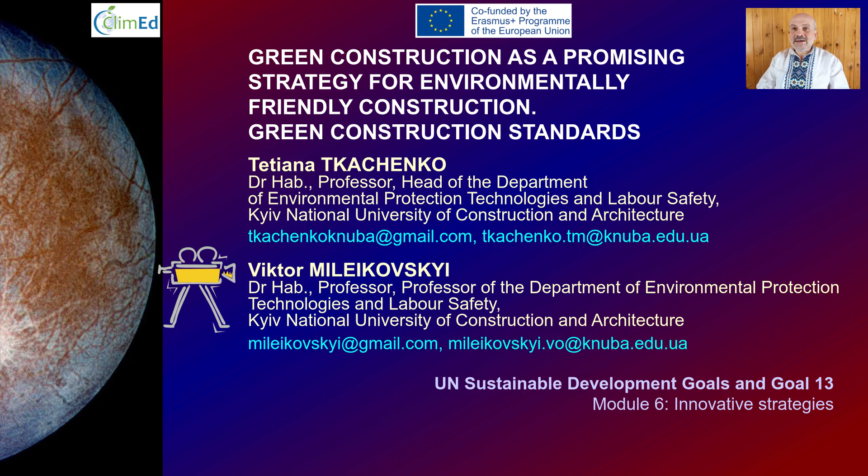Her approach for green structure placement in urban design allows involvement of biota into very high built districts with a lack of greening. In addition, Tetiana designed slope strengthening in Georgia, Ukraine, and other countries.

Let us start from the green construction concept. The problem of creating environmentally friendly buildings is solved by green construction, which can be considered today as one of the mechanisms for ensuring technogenic safety.

Green construction is a body of knowledge structured by design and construction standards. The level of its development directly depends on the achievements of science and technologies, on the activity of engineers, and on the awareness of environmental principles by society.

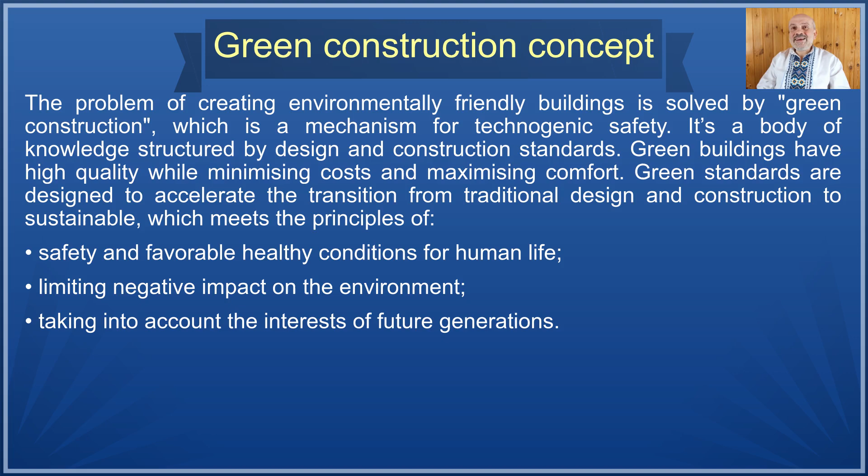Green buildings have high quality while minimizing costs and maximizing comfort. The implementation of green projects contributes to sustainable development, and although green technologies are a new and difficult direction of progress, they demonstrate high efficiency.

Green standards are designed to accelerate the transition from traditional design and construction to sustainable, which meet the principles of safety and favorable healthy conditions for human life, limiting negative impact on the environment, taking into account the interests of future generations. The role of green construction in the concepts of sustainable development of modern cities and territories is shown in this figure.

Green construction involves various areas of activity: the development of green standards, the use of new technologies, architectural and construction solutions, etc.

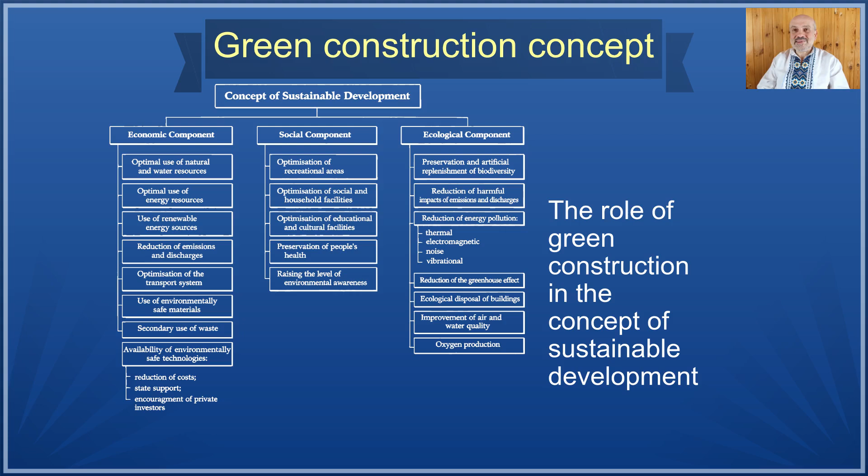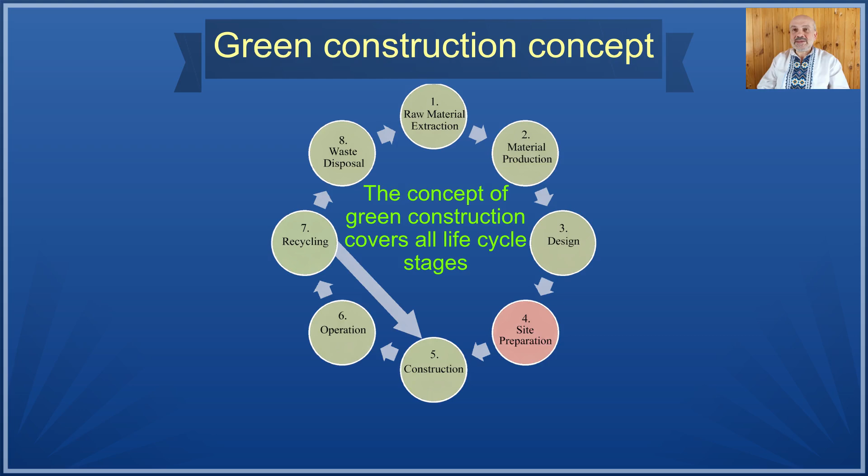The concept of green construction covers all stages of the life cycle of a facility, from raw material extraction to waste management after dismantling. Let us continue with green building standards.

Currently, all green building standards are voluntary, meaning that the customer or developer decides on the level of compliance of the building with the green building concept.

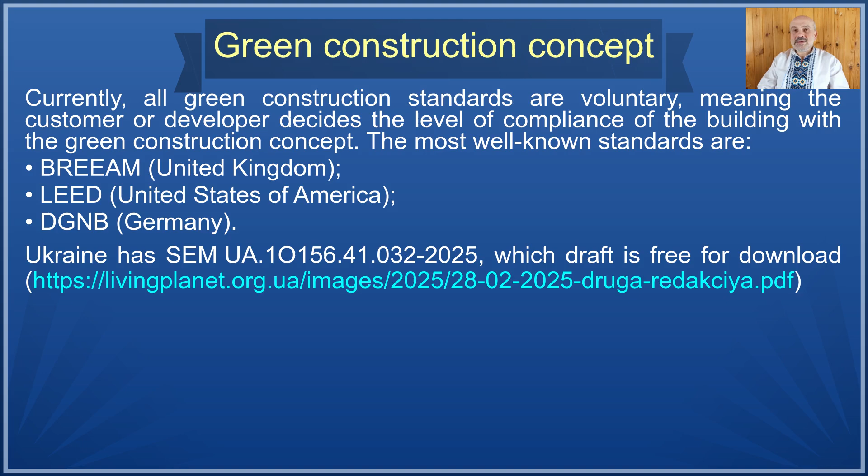The most well-known standards are BREEAM (United Kingdom), LEED (United States of America), and DGNB (Germany). Ukraine has SEM-UA, which draft is free for download.

BREEAM standard, Building Research Establishment Environmental Assessment Method, was developed in the United Kingdom by the Building Research Establishment. It's free for download, but registration is required. It has separate volumes that standardize new construction, reconstruction, and operation of communities.

In new construction, this standard evaluates construction management, health and comfort, energy efficiency, transport, water consumption, materials, waste management, land use and environmental friendliness, pollution, and innovations.

Green construction begins with management. Namely, the following are standardized: stakeholder engagement, appointment of a sustainability champion who will be responsible for the implementation of a sustainable project. This is followed by a life cycle assessment.

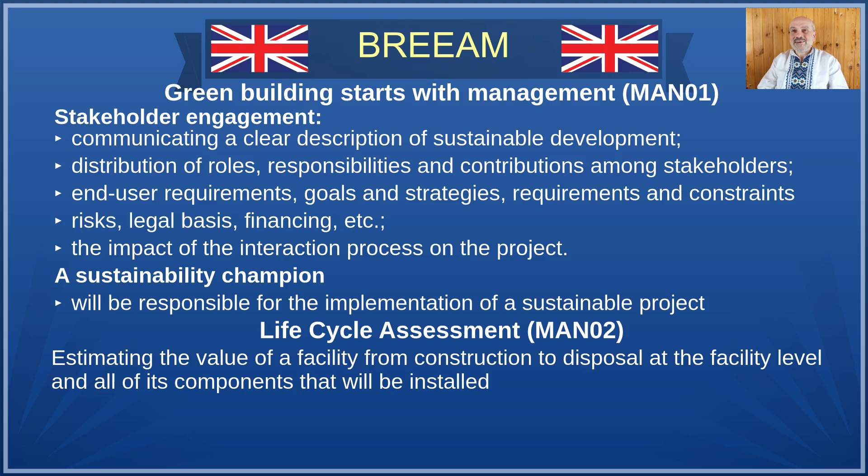The values of the facility from construction to disposal are determined at the level of the facility and all its components that will be installed.

The next is the construction culture. It means a comprehensive limitation of all factors that negatively affect both the lives of people around the construction site and the environment. In particular, the following factors are regulated: smoke and dust emissions, production of noise and vibrations, heavy transport routes, resource use, electricity, water, etc.

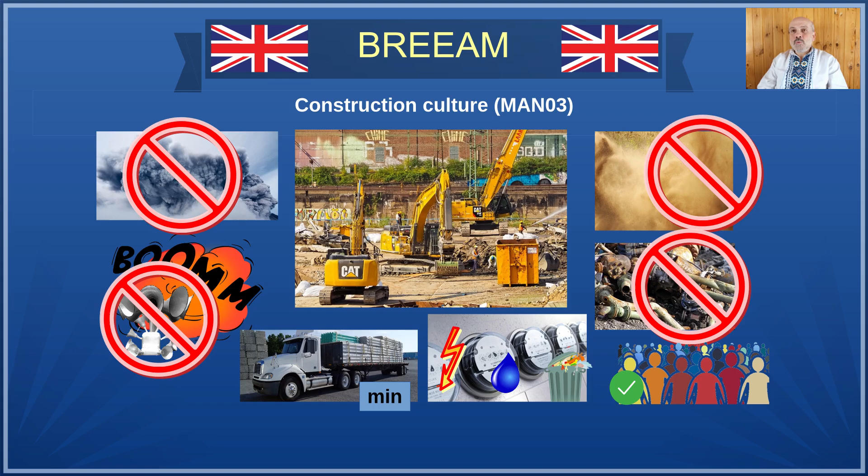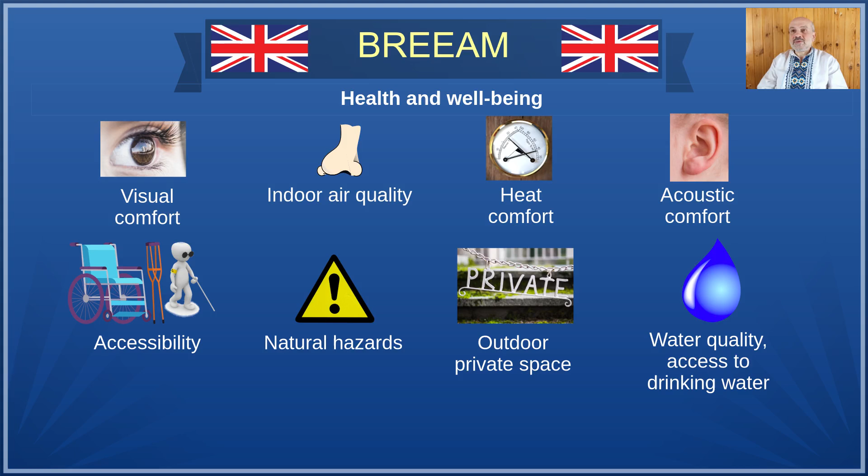The main condition is to promote the comfort of people around the construction site. In a building, the level of comfort is standardized as a priority requirement, namely visual comfort, indoor air quality, thermal comfort, acoustic comfort, accessibility, inclusivity, impact of natural hazards, creation of an external private space to ensure communications between people, water quality and access to drinking water.

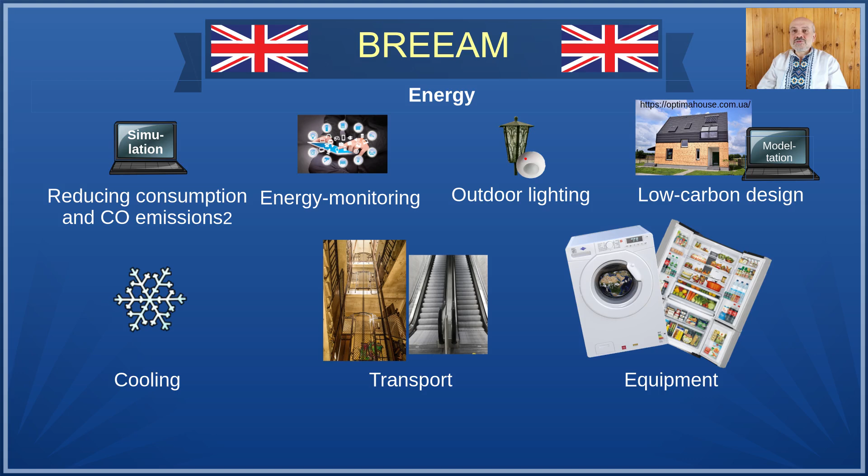Further, during operation, the consumption of energy and other resources, as well as carbon dioxide emissions, is standardized. Energy monitoring is provided. The standard covers not only building structures, but also equipment.

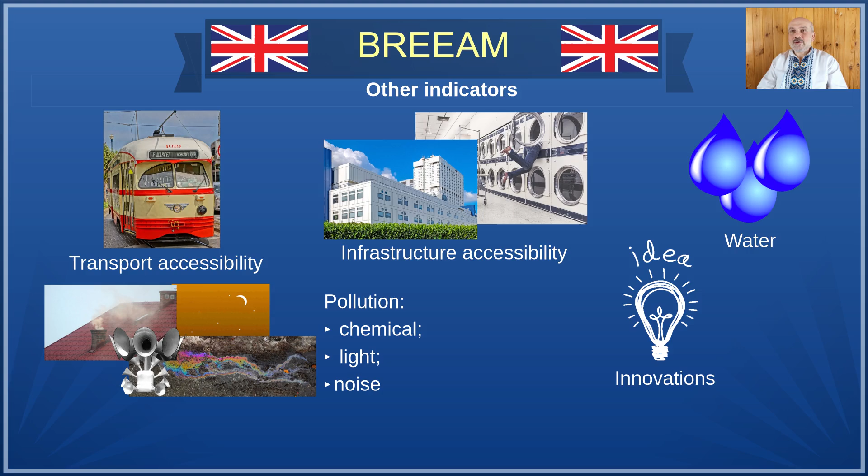Among other indicators, there are transport accessibility, infrastructure availability, accessibility of water bodies, and chemical, light, noise pollution of the environment. The introduction of innovations is also encouraged, which not only allows for increasing the level of comfort and environmental friendliness, but also stimulates scientific and technical activity.

There are BREEAM-certified facilities in Ukraine, including the Diadans residential complex in Kyiv.

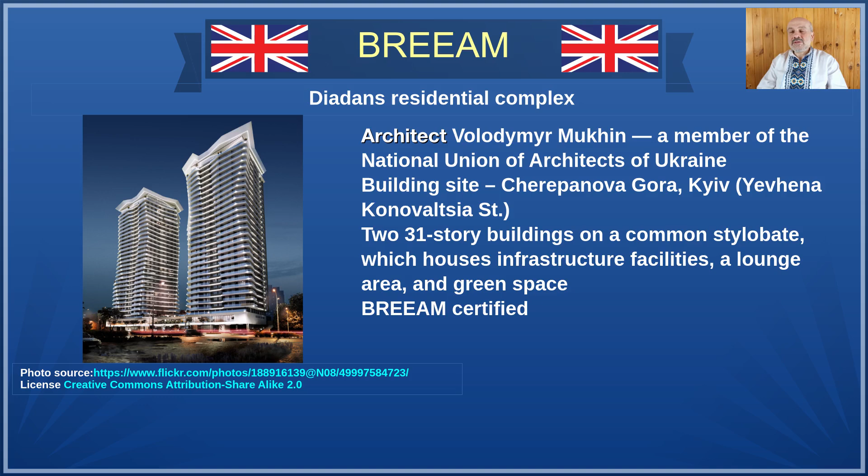LEED standard, Leadership in Energy and Environmental Design, was developed by the public organization United States Green Building Council and concerns new construction, reconstruction, commercial interiors, and communities.

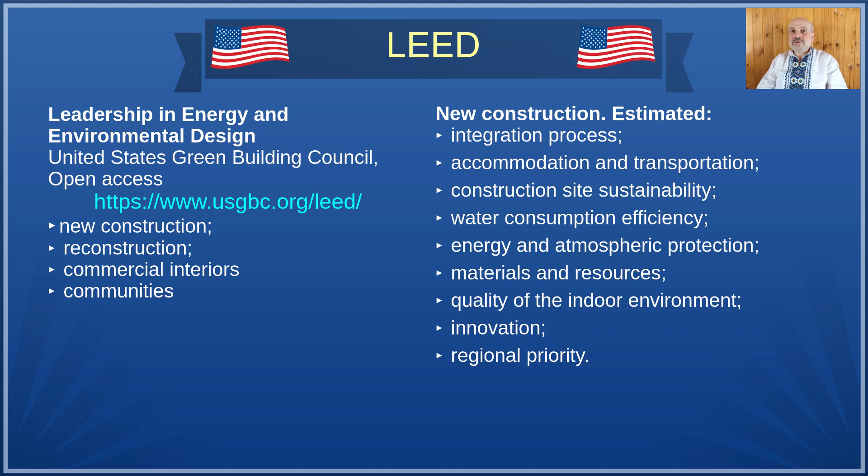In new construction, this standard evaluates integration process, accommodation and transportation, construction site sustainability, water consumption efficiency, energy and atmospheric protection, materials and resources, quality of the indoor environment, innovation, and regional priority.

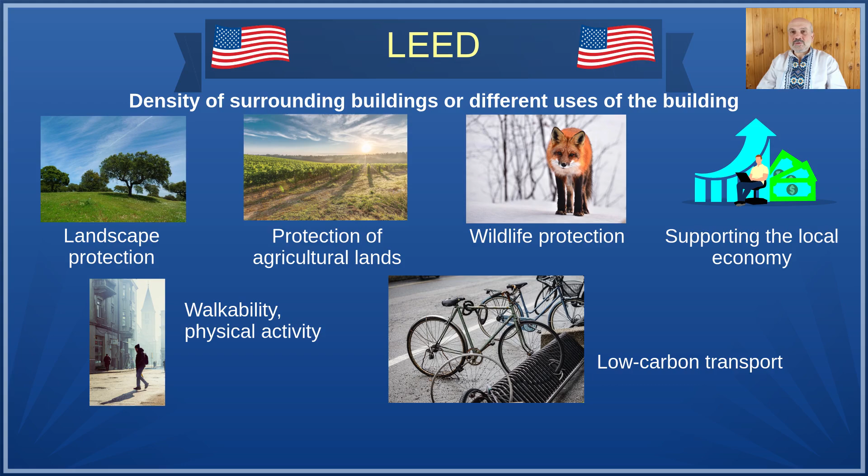Evaluated aspects include landscape protection, protection of agricultural lands, wildlife protection, supporting the local economy, pedestrian accessibility, physical activity, conditions for low-carbon transport, habitat protection and restoration, protection of existing landscapes, restoration of disturbed areas, providing habitats, and maintaining biodiversity.

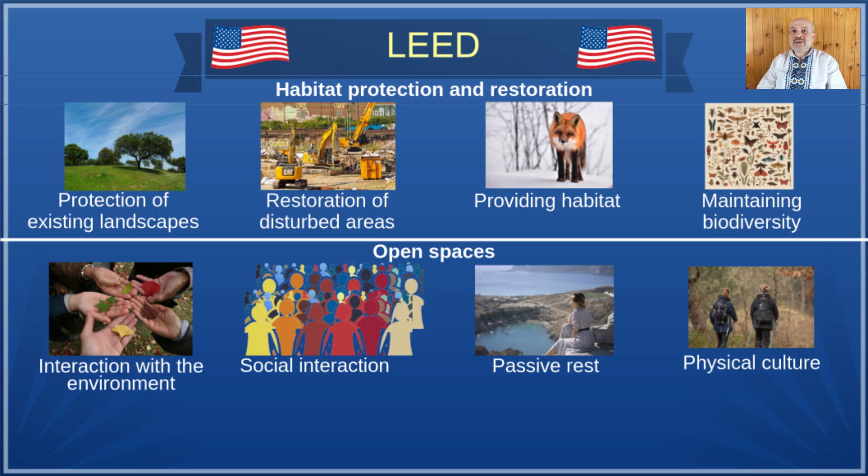Open spaces should be designed to provide human interaction with the environment, social interaction, passive recreation, and physical culture. Rule: leave and protect 40% of the site, or restore 20-40% of the disturbed area, restore the soil disturbed during construction, and plant a minimum of 6 species that are characteristic or adapted to the area.

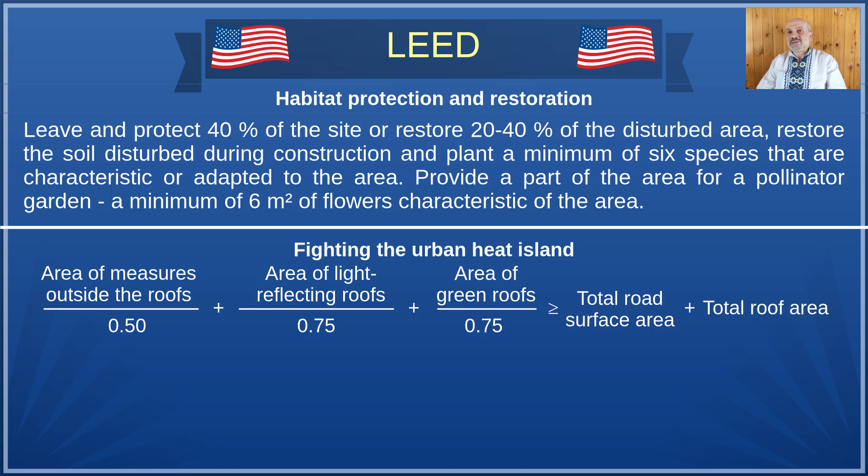Set aside part of the area for a pollinator garden, a minimum of 6 square meters of flowers characteristic of the area. The formula for combating the heat island effect: area of measures outside roofs divided by 0.5, plus area of reflective roofs divided by 0.75, plus area of green roofs divided by 0.75, should be greater than or equal to the total area of road pavements plus area of roofs.

SEM-UA: public buildings, environmental criteria and methods for life cycle assessment. The standard is unique and ahead of global analogs due to the following advantages: integrating the indoor and outdoor greening of the building and the surrounding area into the design of the whole to solve technical, environmental, and social problems.

Elements ensuring the accessibility of the facility can be quickly deactivated in military events. Backup of life support system in case of emergencies.

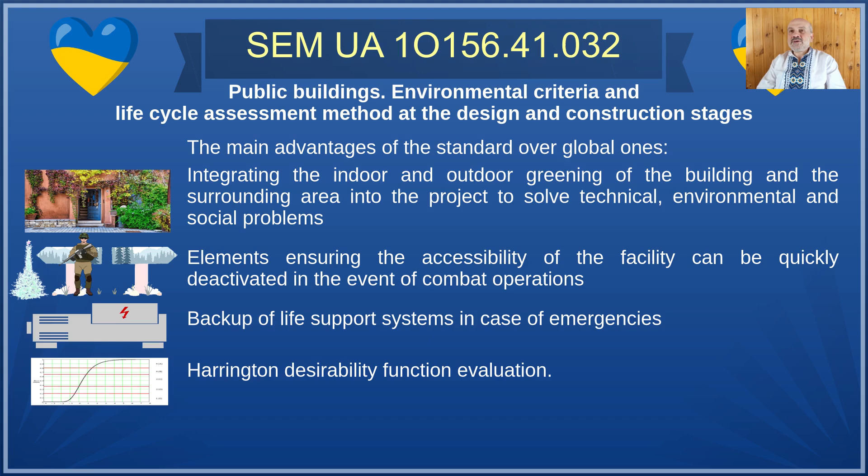Harrington desirability function assessment involves not adding but multiplying the scores for each section, in the range from 0 to 1. It's impossible to compensate for the failure of one section with the others. The overall score cannot be higher than the score of each section separately.

Now let us talk about green structures as an important element of green construction. Green structures are biotechnological tools that combine building structures and living plants. Today, various versions of green structures have been developed, which can be conditionally divided into 3 classes: horizontal greening systems, vertical greening systems, and kinetic or mobile greening.

Green structures allow solving various problems in various fields of architecture, engineering, design, rehabilitation, psychology, etc. We can conditionally divide it into 3 groups: improvement of the environment, energy efficiency, and caring for future generations. They play an important role in green construction. Green structures create conditions for eco-regulation, a psychological technique for overcoming stress through interaction with living nature.

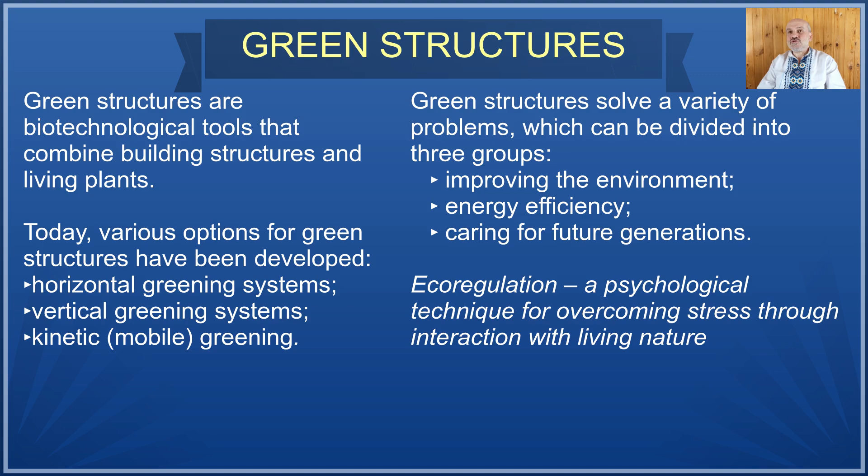A comprehensive study of the technical effects of plant layers conducted at the Kyiv National University of Construction and Architecture allows reaching a new level of design of such structures.

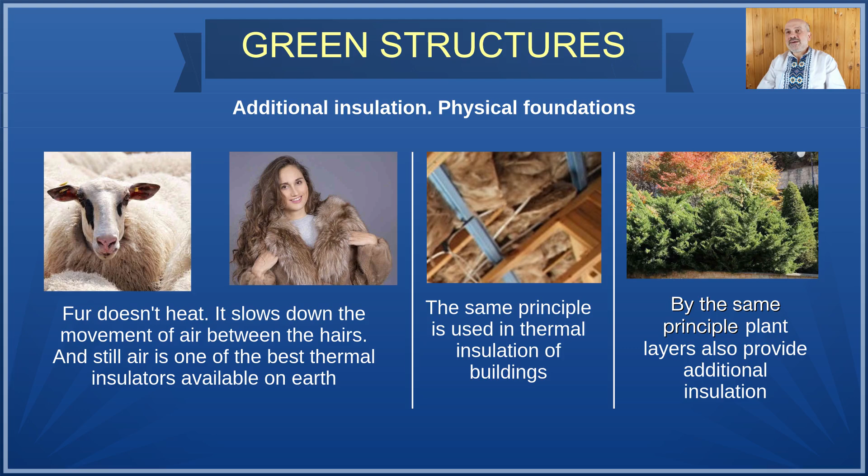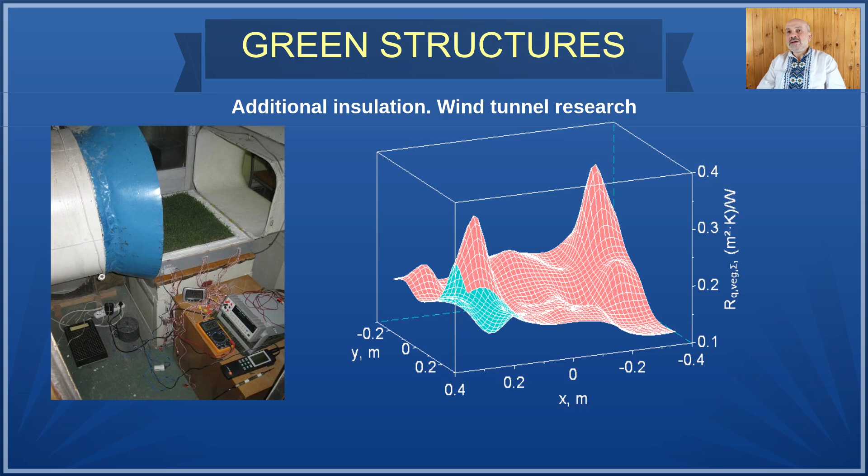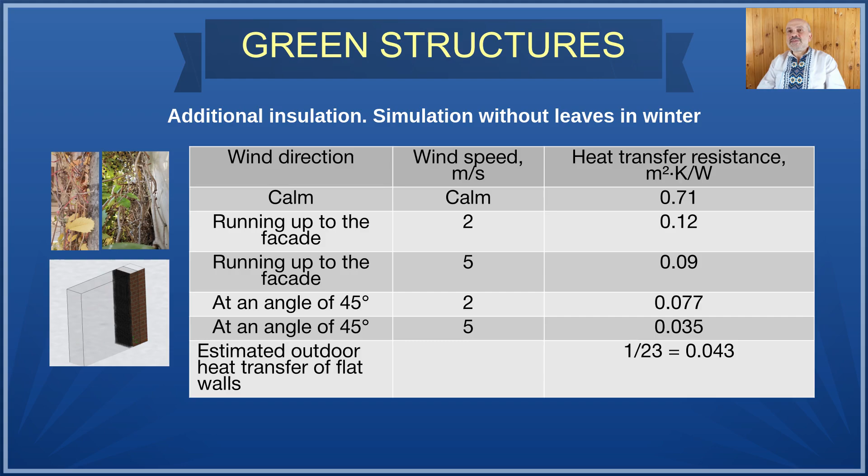Additional insulation of a building with plant layers functions on the same principle as clothing or building insulation. It immobilizes air in a layer, which is the best available thermal insulator. For example, in the cold season, the herb Parthenocissus quinquefolia creates an additional thermal insulation barrier. Despite the fallen leaves, the vegetative layer of Parthenocissus quinquefolia has a significant effect on the heat transfer resistance of walls, which is confirmed by mathematical modeling and experiments.

In addition to insulation, plants have a cooling effect, defined as the temperature difference between outside and under the plant layer. This is due to evaporation of moisture through stomata in the leaf—transpiration—or from the substrate and stomata in the leaf—evapotranspiration. Evaporation of water requires energy, which is taken from the environment, resulting in a decrease in temperature.

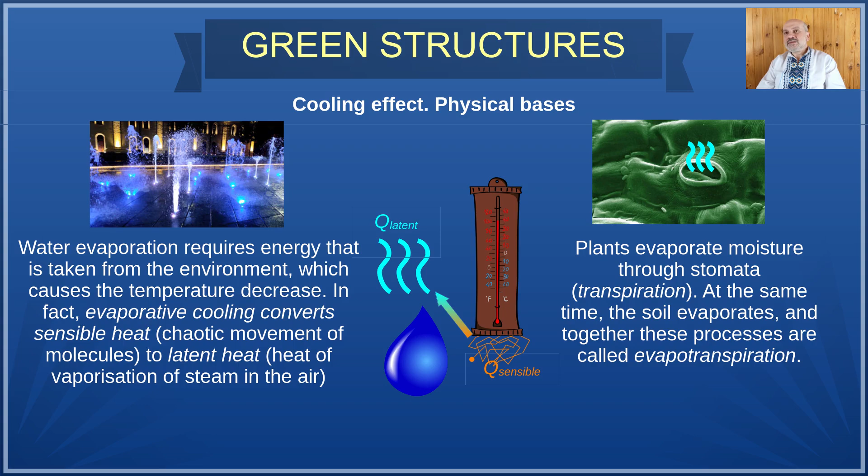In air conditioning, a decrease in air temperature during evaporation is called direct evaporative cooling. In this case, sensible heat, the energy of chaotic motion of molecules, is converted into latent heat, the heat of vaporization of vapor in the air.

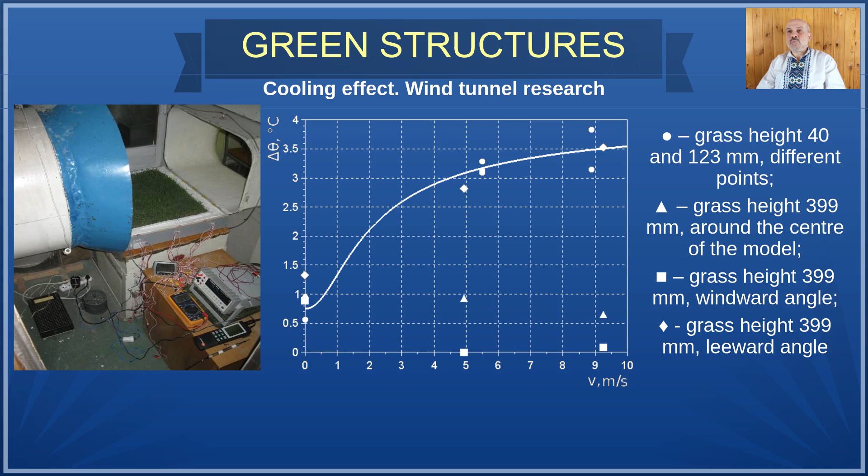The cooling effect of the grass layer is shown. It can be seen that air movement significantly reduces it in the middle and front parts of the model, from the wind attack side, because the wind, instead of blowing away the released water vapor, bends the grass and prevents the vapor from leaving the space between blades of grass.

The oxygen-carbon dioxide gas exchange in plants was studied in a special gas exchange chamber at the Kyiv National University of Construction and Architecture. To assess the influence of different light sources, a new unit of measurement of illumination, E, was introduced: phytolux, weighted by the typical photosynthetic efficiency curve. It's numerically equal to the lux for sunlight at sea level.

Carbon dioxide absorption also depends on the molar fraction of carbon dioxide in the plant zone.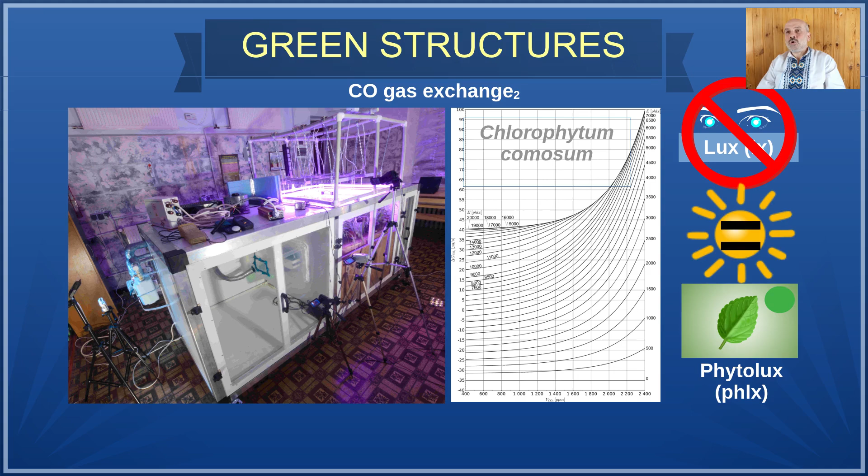And let us conclude. Green construction is a concept that ensures the sustainability of the construction industry. It creates safe and healthy living conditions for people, limits the negative impact on the environment, and takes into account the interests of future generations.

Green standards are currently an important mechanism that regulates the process of green building. They are voluntary, but over time they will become more widespread. Today, any company that wants to gain a foothold in the construction market must build energy efficiently and in compliance with green standards. Green structures are an effective measure for solving various tasks in the green construction framework.

The research results at Kyiv National University of Construction and Architecture allow lifting the green structure technique to a higher level. Thank you for your attention.